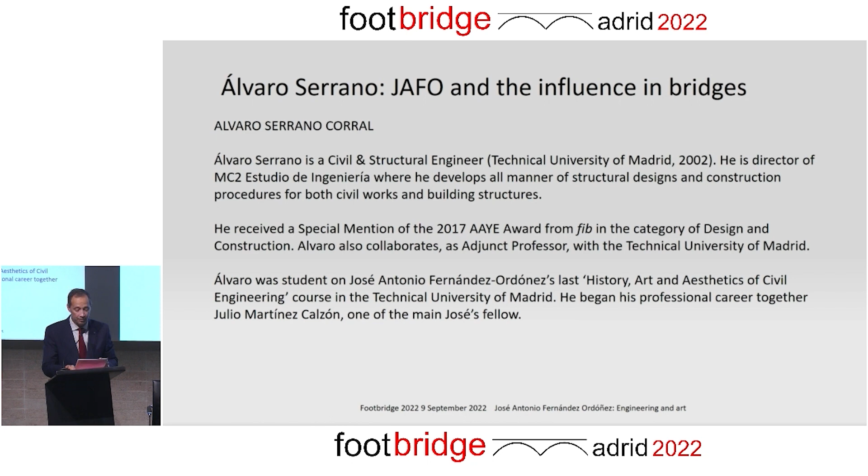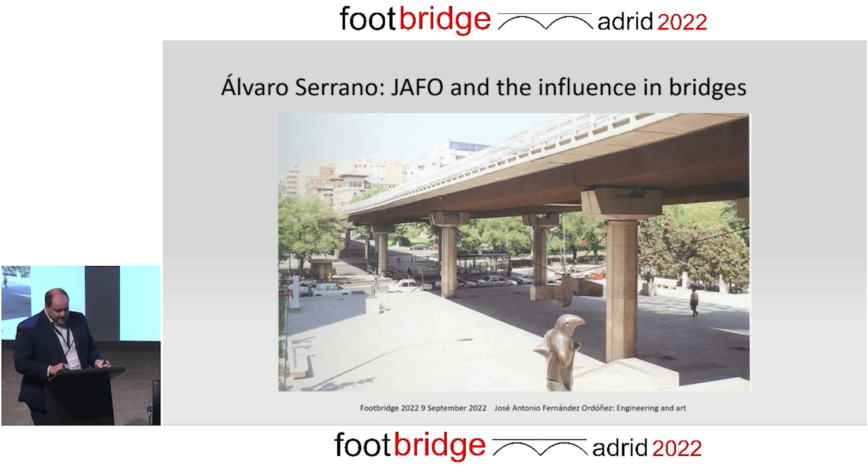Thank you very much, David. It's for me a pleasure and also an honor to do this review of José Antonio Fernández Ordóñez's works on bridges and also footbridges. Then let's begin.

When José Antonio Fernández Ordóñez finished his civil engineering studies in Madrid in the late 1950s, at that time, with few honorable exceptions, the panorama of bridge engineering in Spain, as he stated himself, was dominated by a system of obvious things protected by common sense in an environment of resistance to creation.

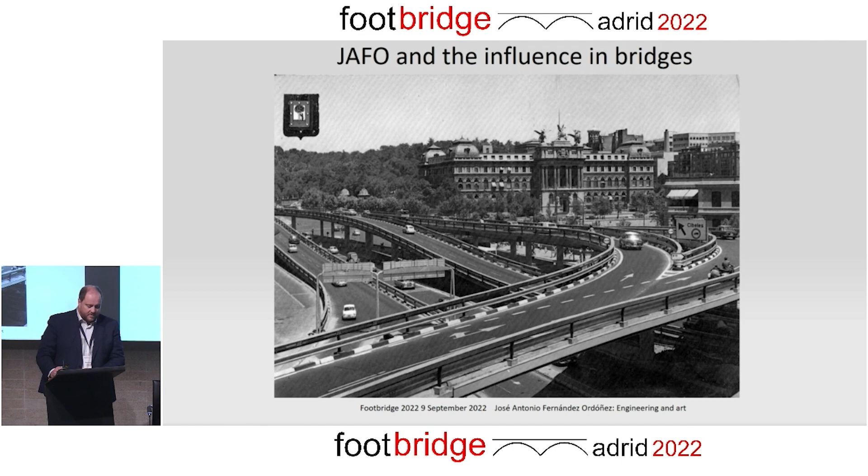And the bridge, as a symbol of engineering and connection between people and therefore progress, had become an absolutely utilitarian, routine element, and in many cases indifferent to people who tended to reject it as a reaction.

At the end of the 1960s, the City of Madrid called a design and build competition for the construction of a bridge over the Plaza de Cuatro Caminos, to which the young José Antonio, along with his colleagues Julio Martínez Calzón and Alberto Corral, participated.

They did not win the contest, probably because of the novelty of the proposal and also because of the excellent bridge that Carlos Fernández Casado proposed. But the proposal already revealed a new way of understanding bridge design, and the team was effusively congratulated.

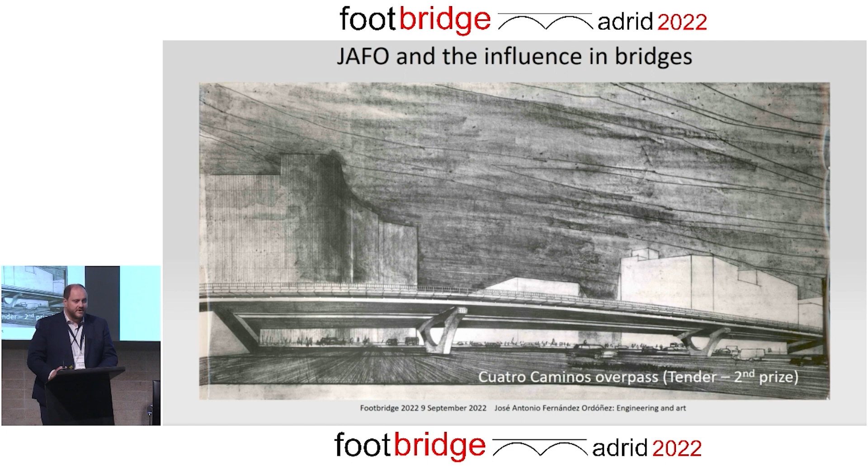On his second opportunity, a new bridge to connect Juan Bravo and Eduardo Dato streets over Paseo de la Castellana, the main street in Madrid, the team led by José Antonio, who had joined the sculptor Eusebio Sempere, won the tender.

The Juan Bravo Bridge was a magnificent challenge, crossing the center of Madrid in an area whose urban landscape is extremely sensitive, at a relatively low level and making the crossing of vehicles compatible with urban pedestrian use both above and below the bridge.

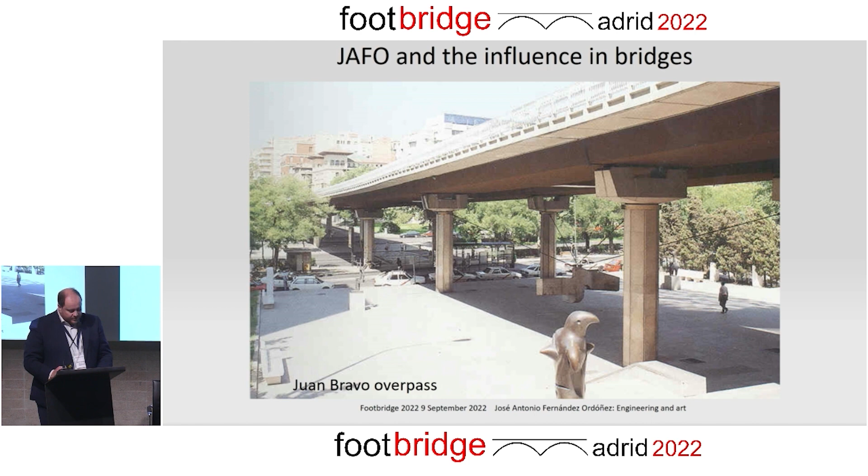And the proposed solution was extraordinary, as it had not been seen before, integrating the bridge into the city and its surroundings.

An exemplary way, introducing a new way of looking at and designing bridges in Spain, especially those located in urban areas. I cannot say it outright, but it was probably the first bridge in Spain whose design, after many years, contained an explicitly justified and rigorous aesthetic study.

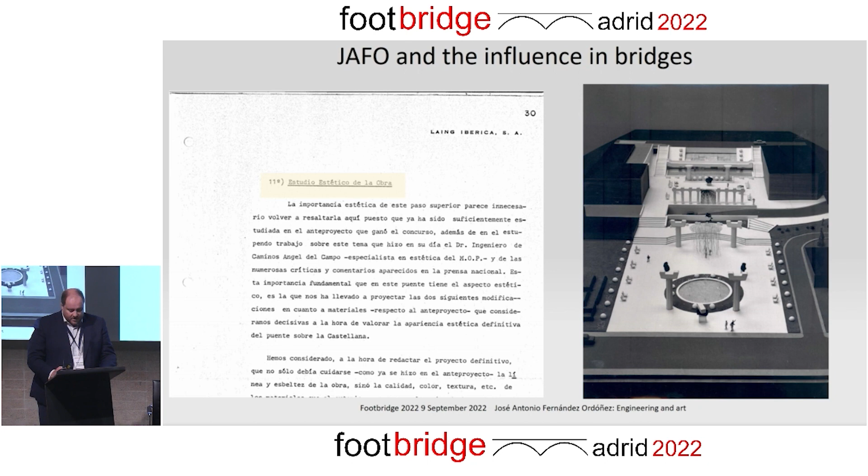An analysis of the work basing itself on drawings, geometric criteria, models, and generation of a multitude of details for each one of the parts of the work. Nothing was conventional or arbitrary. Everything was designed individually.

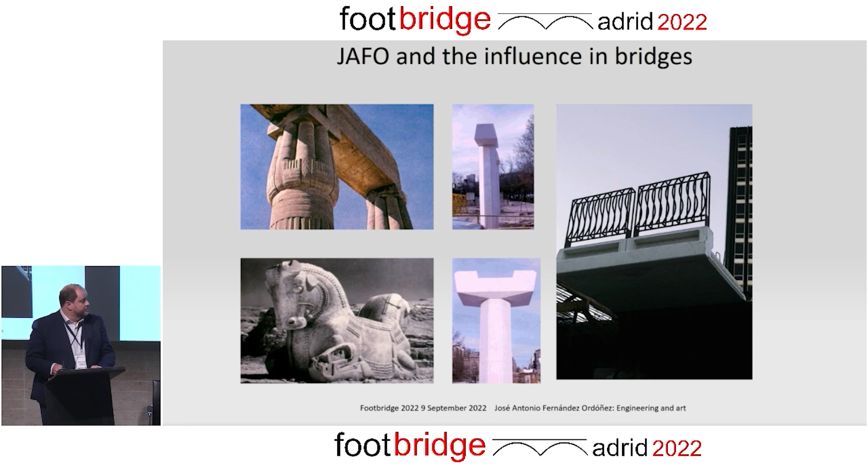It can be said that this bridge changes the concept of ornamentation existing at that time, which, due to pure functionalist hostility, had given rise to a lack of interest and carelessness in details.

José Antonio Fernández Ordóñez does not renounce ornamentation, but renews it from a point of view that elevates and manifests the structural point of view, renouncing everything that is useless, but with the utmost care for details, within the rigor of classical culture.

Technically, the project also represents a notable advance in Spanish bridge engineering, representing the first modern composite bridge to be built in Spain, and including some novelties, such as the use of white concrete in a bridge.

Or the use of prestressed precast slab before connection to the steel girder, built with weathering steel, which was also the first time it was used in Spain.

Beyond just proposing a transit infrastructure, the project designed an entire urban environment of the highest quality, with the permanent exhibition of sculptures by the best contemporary Spanish artists, with some pieces made specifically for this place.

Such as the sculpture by Eduardo Chillida, commonly called the Sirena Varada, the stranded mermaid.

In my opinion, the Juan Bravo Bridge inaugurates in Spain a new way of designing urban or semi-urban bridges in which the viewer's gaze is completely nearby, as the bridges really become objects of the city landscape, similar to any other building or element in the city.

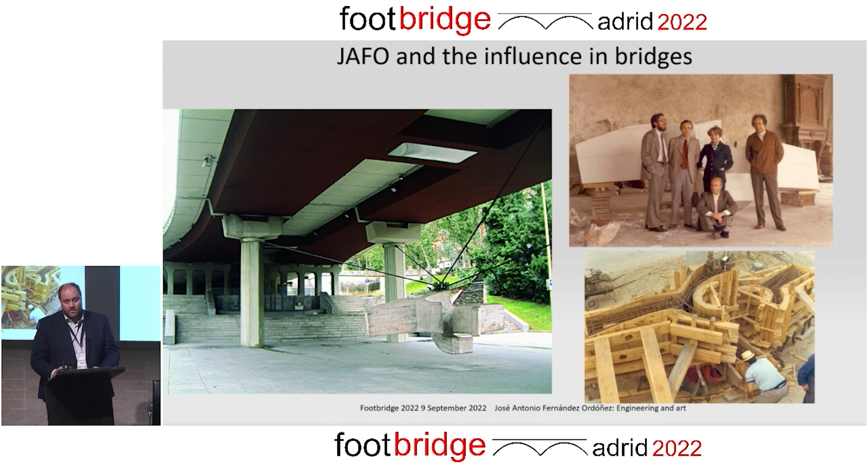With the same perspective, José Antonio designed his second built bridge, the Devil's Bridge in Martorell. In this case, the complexity is manifested by the place where it must be located, with great topographical and geological difficulties, but also with a great historical richness, being a few meters from another Devil's Bridge of Roman origin and medieval construction, with a triumphal arch at its entrance.

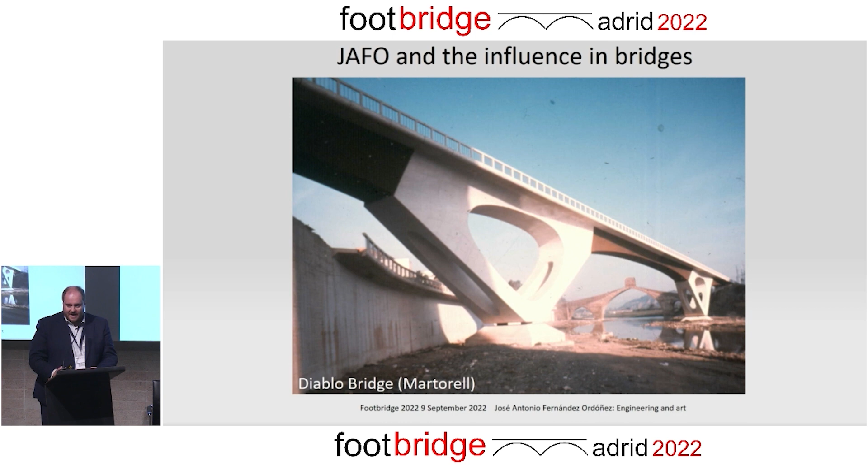The built bridge is a composite structure of prestressed concrete and weathering steel, with two large white concrete piers, which are like two monumental tetrapylons that formally link with the Roman tradition. The four parts of the tetrapylon are joined at the bottom to form a single support, leaving the piers configured with a special character, not prismatic or circular as usual.

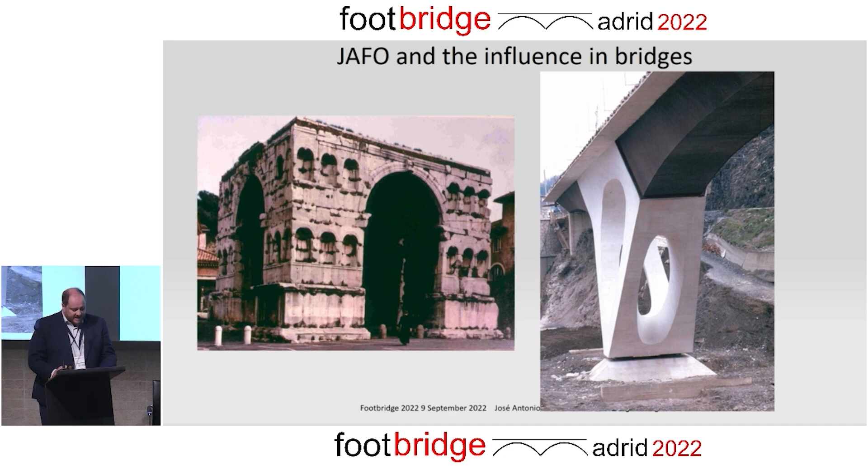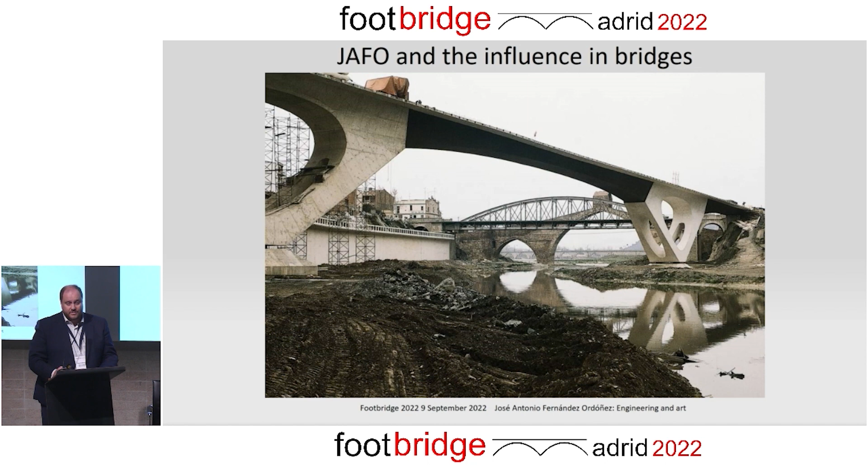The bridge also inaugurates a set of bridges that we could call sculpture bridges, with a deep formal analysis of the large concrete piers, very close to the character of a sculpture, although at the same time fully and harmonically combined with the structural, resistant and constructive aspects. This interest in treating the piers as sculptural elements and their connection with the deck was manifested in many other bridges built later and in multiple models and studies carried out for different projects.

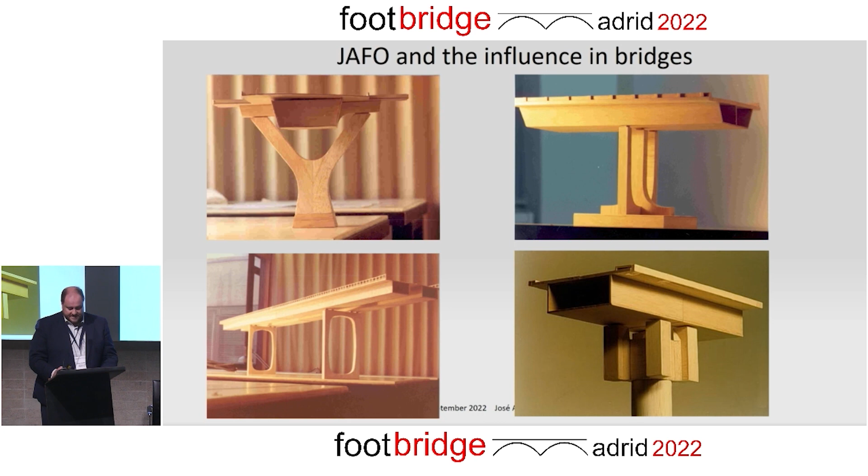10 years later, the Millennium Bridge in Tortosa was designed. This bridge over the Ebro River near its mouth has three spans, the main one with a span of 180 meters, conditioned by the hydraulics of the riverbed, and its piers are essential elements of the design composition. They are conceived with a clear sense of space, far from the usual conventional approach of prismatic or cylindrical piles, and built with white concrete.

Each one consists of a shaft with two cantilever arms on each side, which are part of the composite deck that is fixed to them. These two large sculptural piles also resemble the T of the city of Tortosa.

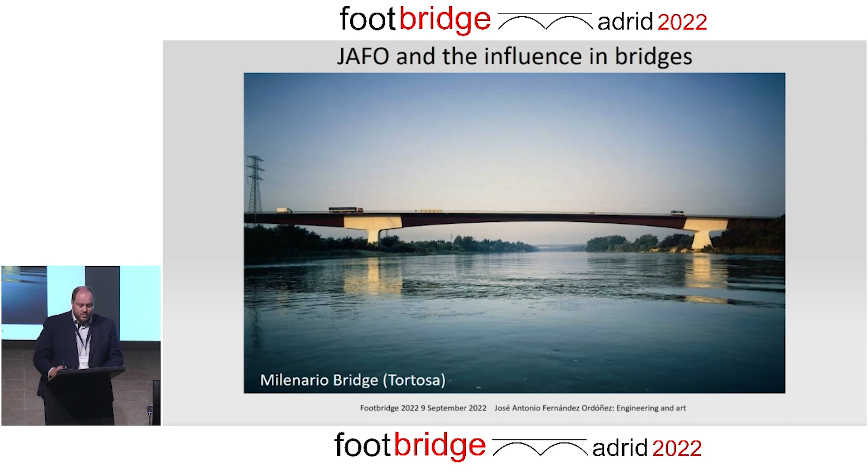José Antonio Fernández Ordóñez believed that this bridge should transcend the mere fact of a public work, and designed its abutments as two twin buildings to house a museum about the Ebro River, although only one abutment was finally used. Besides, this bridge had the longest span in the world for 4 years for a composite bridge, with 180 meters.

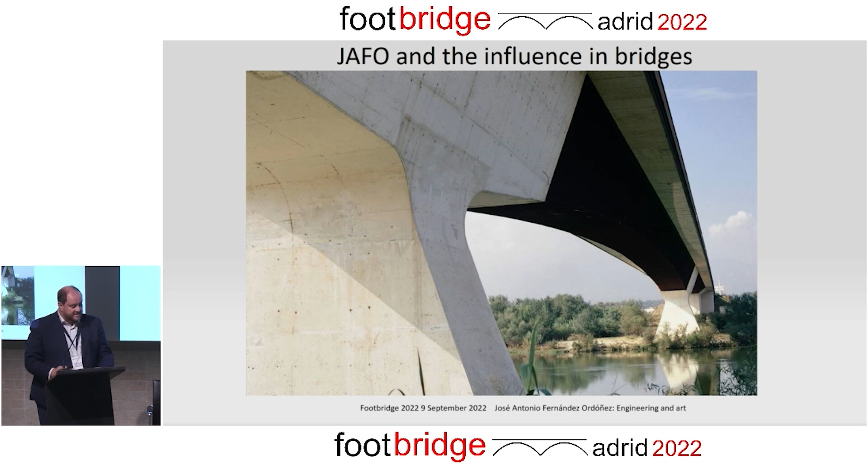The next milestone in José Antonio's works is the Bridge of Centenary in Sevilla. This large-scale bridge was designed and built at the end of the 1980s in collaboration with Julio Martínez Calzón, Francisco Millanes, and Guillermo Ontañón, and consists of a cable-stayed bridge with a main span of 265 meters and almost 50 meters above the river, with two large access viaducts totaling about 2 kilometers.

Without neglecting the inevitable emblematic character that a structure of its dimensions was designed to acquire, the intervention in the outskirts of the city demanded a high aesthetic dignity, which also had to be maintained at a strict cost level and with a fast and efficient construction system.

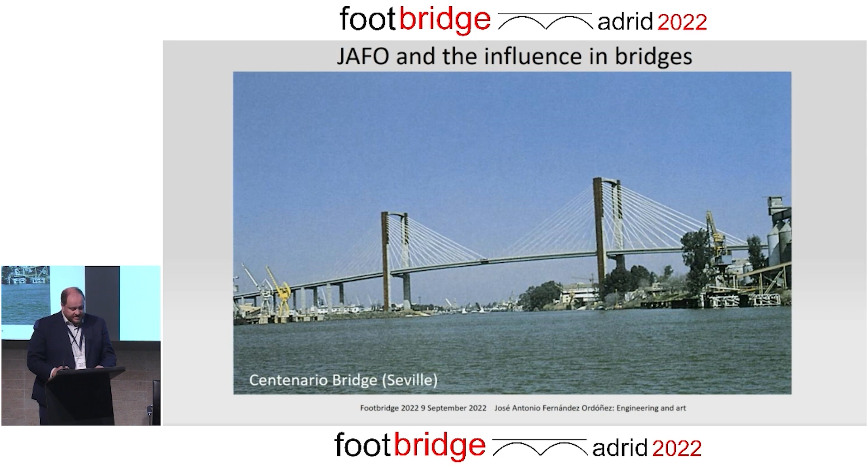The solution came from the combined use of steel and concrete in a large pylon and the systematic precasting of the deck. Thus, the composite structure of the pylon achieves a mutual and total understanding, not differentiating between the two materials, steel and concrete, which also facilitates their construction process.

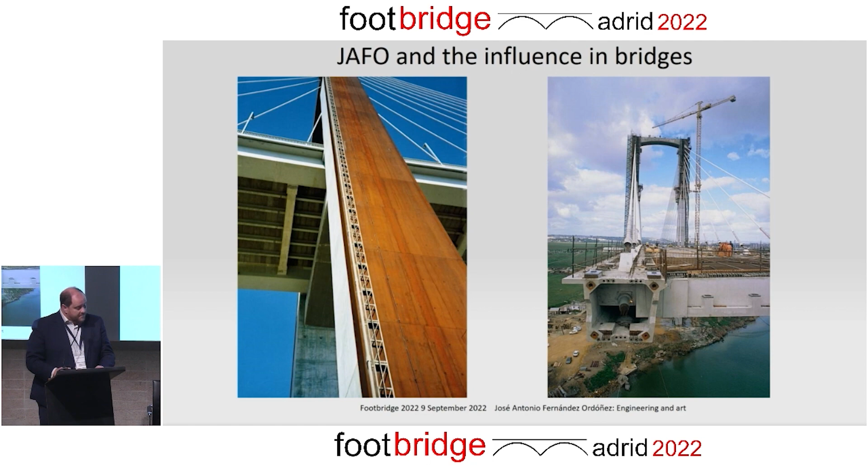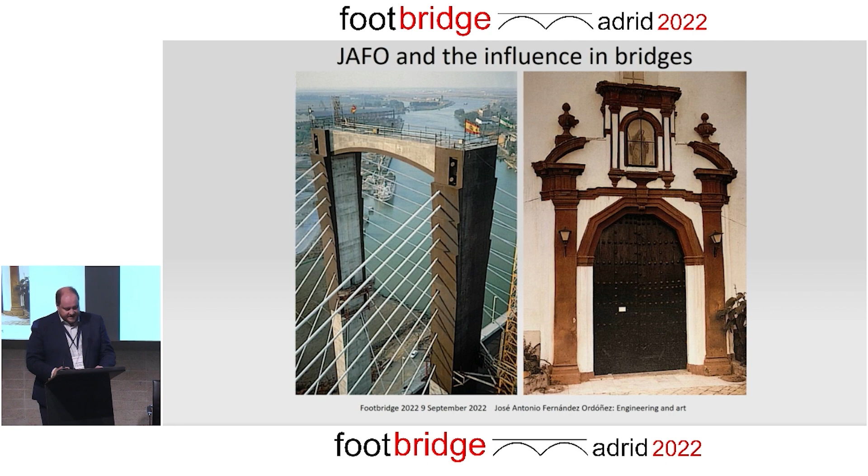Memory and place are also two of the essential dimensions that come together in José Antonio Fernández Ordóñez's bridge projects, both being closely linked. His bridges dialogue with the place where they are located, not only with the sensible landscape but also with the cultural landscape. In this case, the pylons, due to their shape and color, evoke the houses, churches, and patios and courtyards in the city of Seville, in a subliminal way that contributes to intensifying the deeply personal character of the work.

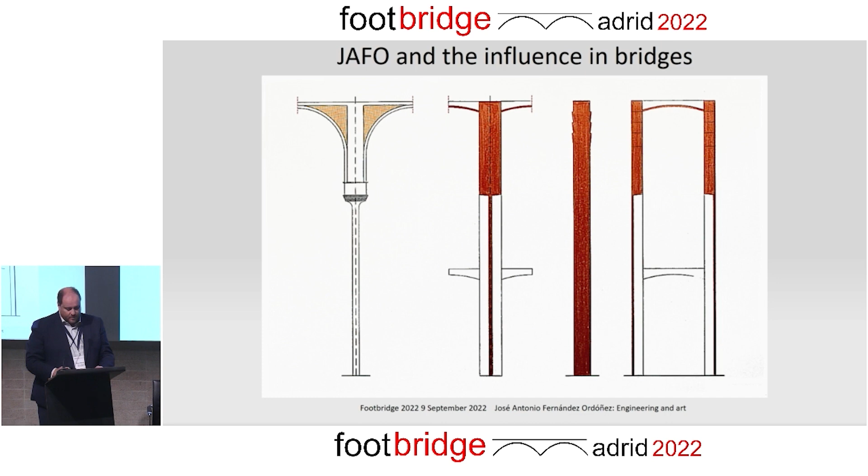The deck, on the other hand, is made up of 4 prefabricated typical elements that allow a fast and systematic construction with a very controlled quality.

The viaducts of Camas and Guadalquivir, two railway bridges, extend over a very flat and luminous landscape, which successively crosses farmlands, channels, roads, and particularly the Guadalquivir River, always at a very low height. It is a railway viaduct, so with high loads, which, in the absence of large obstacles to overcome, requires a moderate span and high deck, which usually leads to a crude, heavy, and unfortunate design.

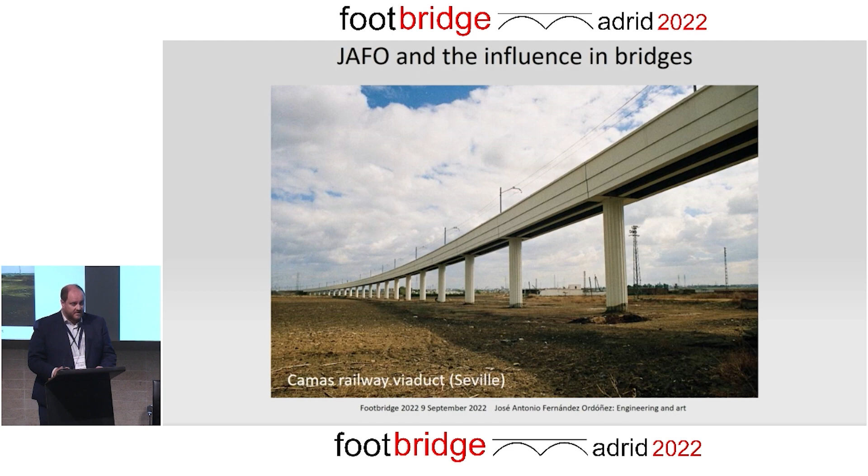In this bridge, José Antonio Fernández Ordóñez radically breaks the preconceived engineering idea that associates slenderness with aesthetic quality, proposing a visual deck height of 4.5 meters for only 33 meters of span, just over 1/7.

In this case, he conceptually deals with the problem of slenderness in a different way than usual. Instead of contemplating the relationship between the small span of each span with respect to the depth of the bridge, he considered that this should be valued as a unitary piece with respect to the wide Guadalquivir Valley, perceived as a whole, as a long ribbon extending over the landscape that is perceived between both abutments.

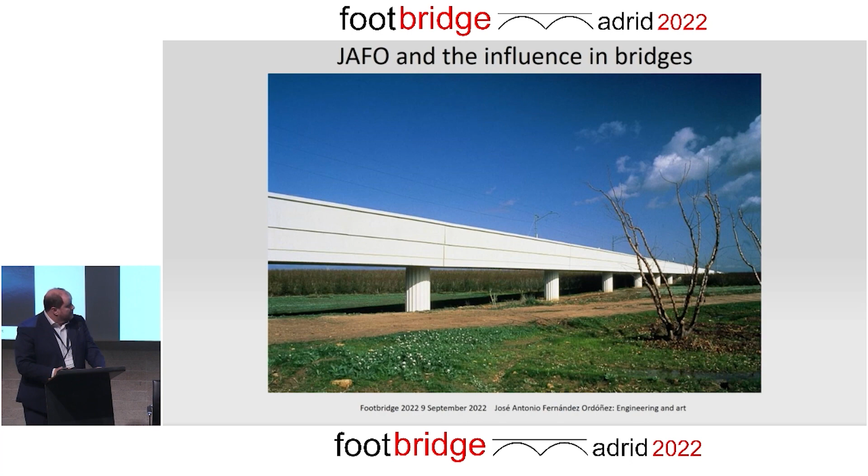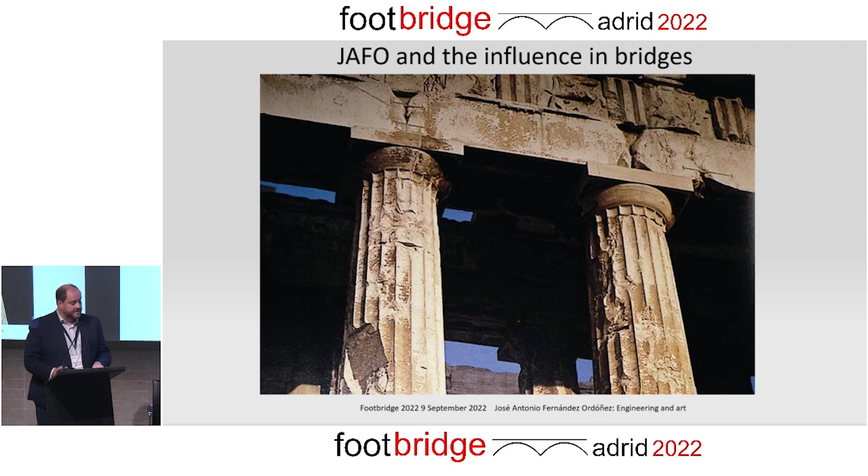The historical component, in this case, is achieved by seeking a presence very close to Greek art, using a reference image of a continuous bridge supported by a colonnade. The economy and constructability of this solution was achieved through the systematic use of prefabrication and the use of statically determined spans.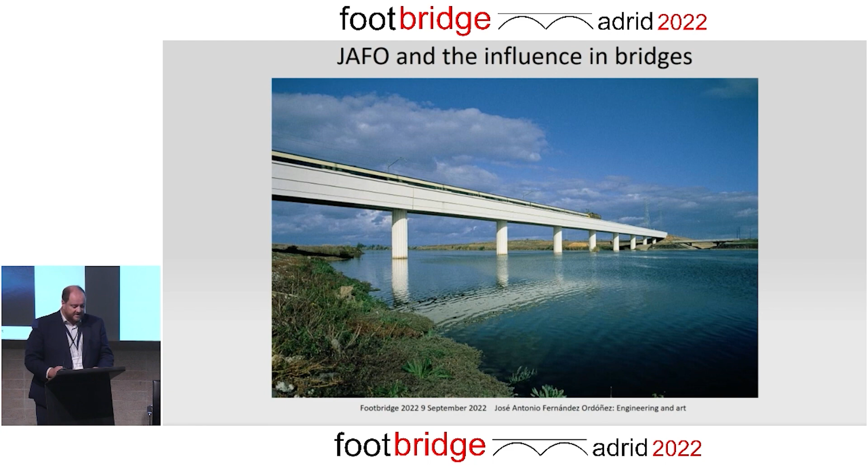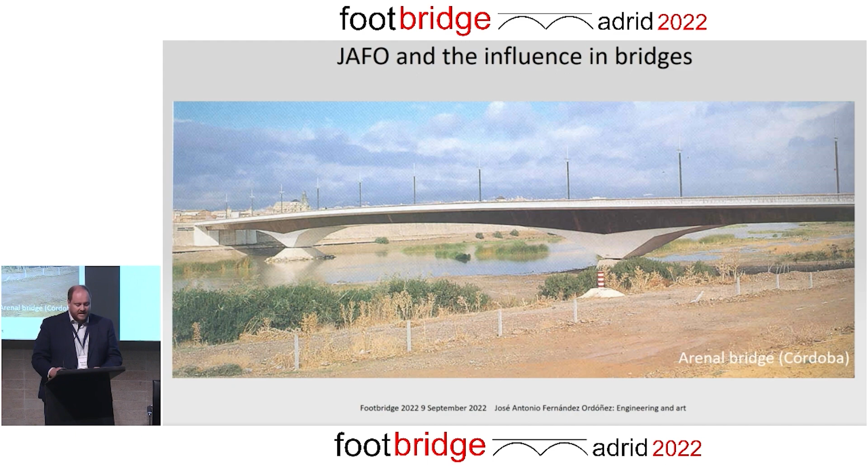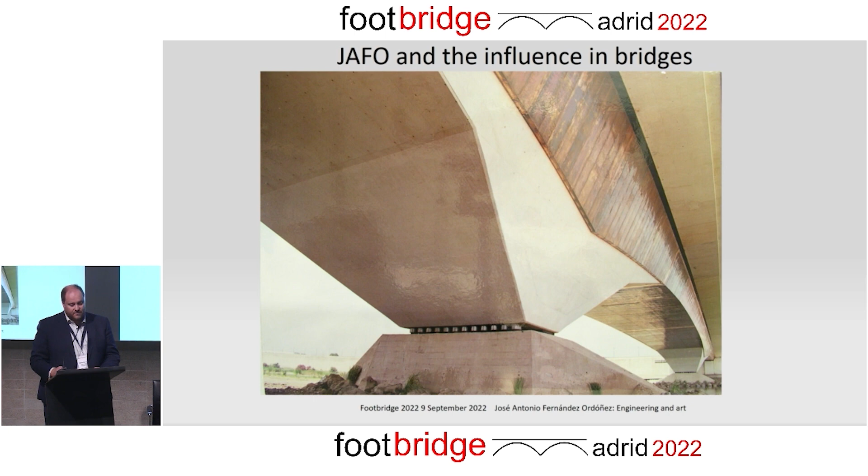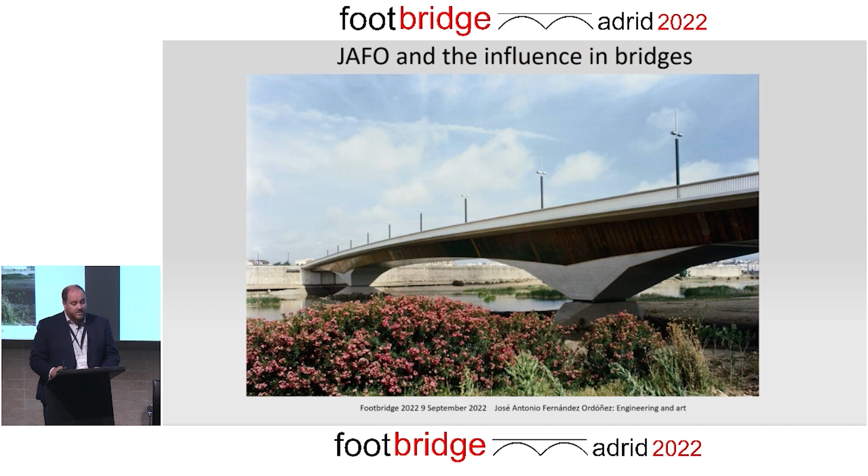The Arenal Bridge over the Guadalquivir River in Córdoba represents another important milestone in the introduction of typological and aesthetic structural innovation in composite bridges, as well as joining the line of sculptural bridges with large concrete piers and composite decks. On the aesthetic level, its essential novelty lies in the use of white concrete in the decks and pylons, and in the cladding of the bridge structural steel with thin sheets of copper, in order to get as close as possible to the image of the historic buildings of the city of Córdoba, with its whitewashed facades and copper-colored roofs.

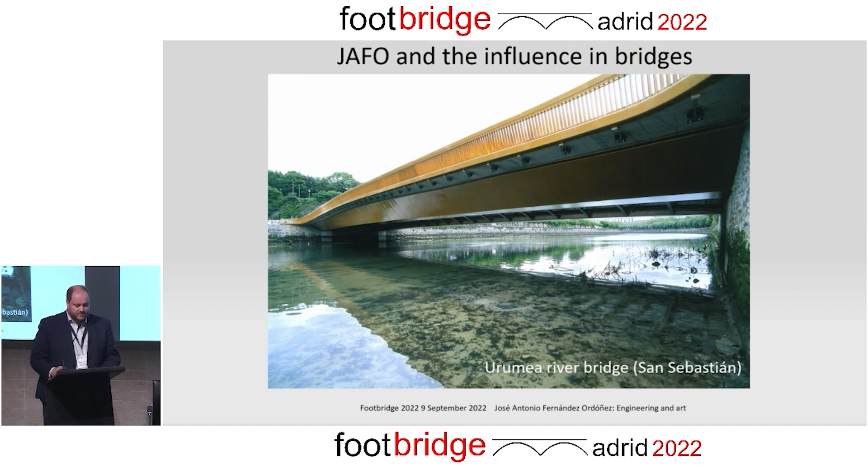The fourth bridge over the Urumea River in the city of San Sebastián was the winner of a competition held in 1992. The bridge, despite being located in a monumental city with monumental bridges, is not presented as an ostentatious or gimmick work. On the contrary, it presents itself in a simple, serene, and elegant way, simply built to fulfill its mission of crossing a modest estuary in a beautiful city.

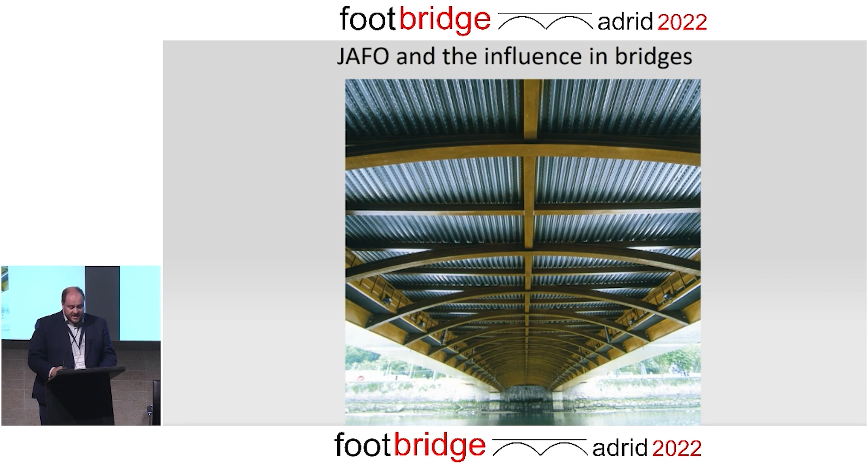All the simplicity of its design, almost devoid of any aesthetic intention, changes when the power of its technique is revealed, with a very slender deck, approximately 1/30, fixed in its abutment by means of elastic fixing cells. In this bridge, everything relies on precision and rigor in the choice of materials and attention to detail to constitute a work of total harmony and dignity.

The Infante Dom Henrique Bridge over the Douro River in Porto is the last great bridge designed by José Antonio, together with Francisco Millanes and his team in Ideam, and Antonio Adao da Fonseca and his son Lorenzo, and he unfortunately did not get to see it finished due to his premature death in the first days of the year 2000.

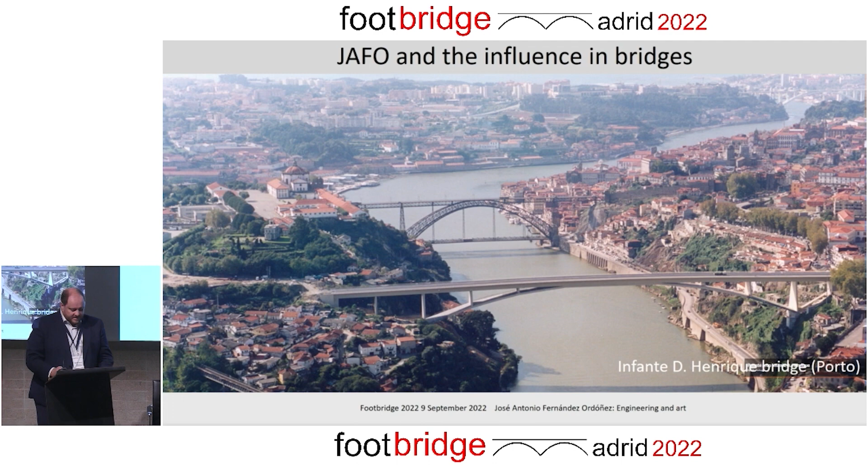This place is magical for any bridge engineer. The magnificent city of Porto at the mouth of the Douro, surrounded by bridges that are historical milestones in bridge engineering history. The bridge has no desire to enter into competition, neither with the wonderful skyline of the city, nor with the rest of the bridges that surround and accompany it.

The solution is simple and neutral for the city, without renouncing a vanguard technology, but this technique remains discreetly in its place, without appearing ostentatious. Porto did not need any more ornamental symbols.

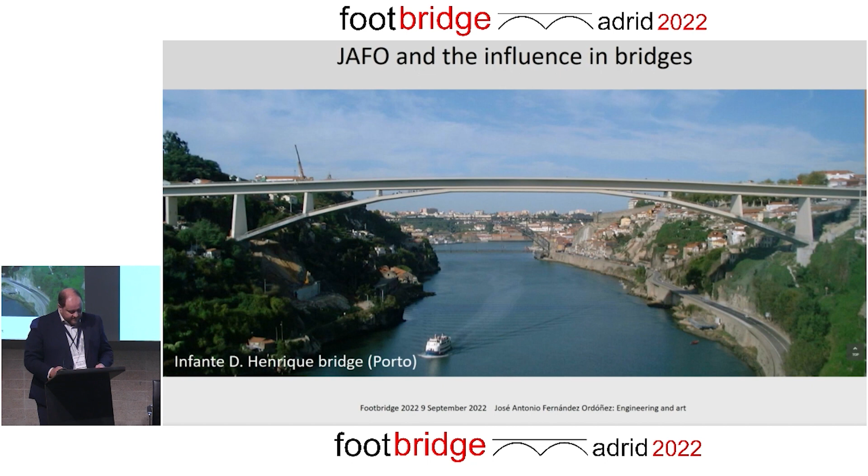The bridge flies like a bird from Porto to Vila Nova de Gaia, without leaning on the Douro riverbed, not even on its banks, with great cleanliness and sensitivity, expressing its functionality in the purest possible way.

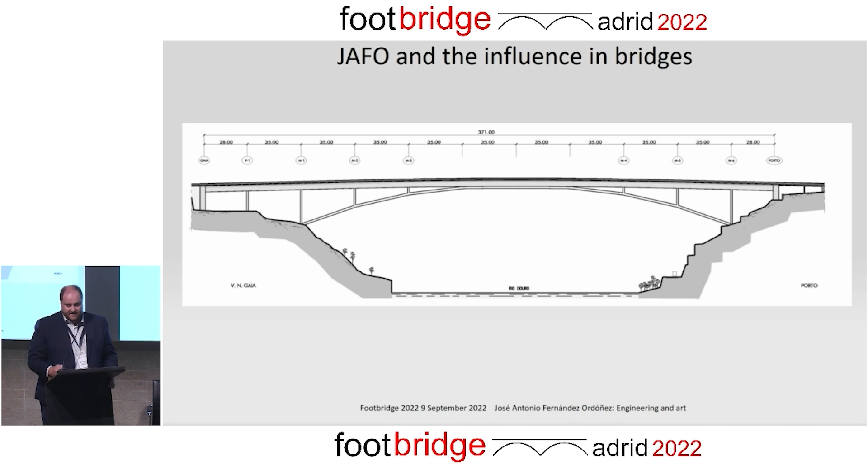A singular and very slender arc, 1.5 meters deep for a span of 280 meters, which naturally and harmoniously rests on the high rocky areas of the river slope, built by cantilevering from both banks.

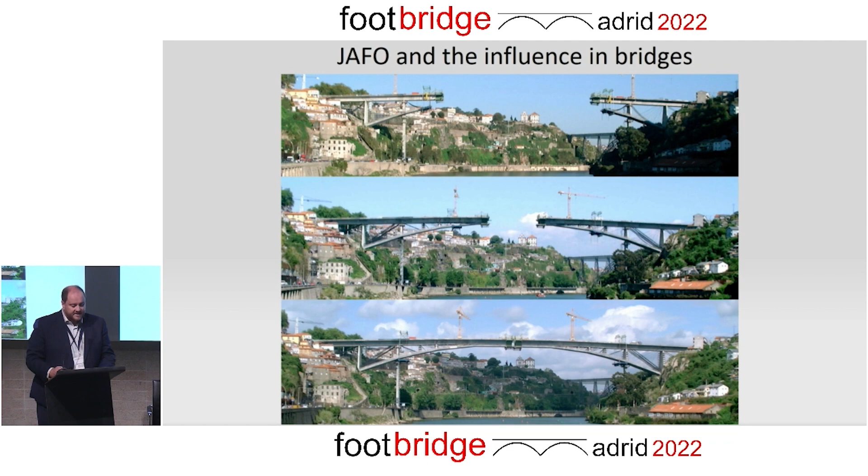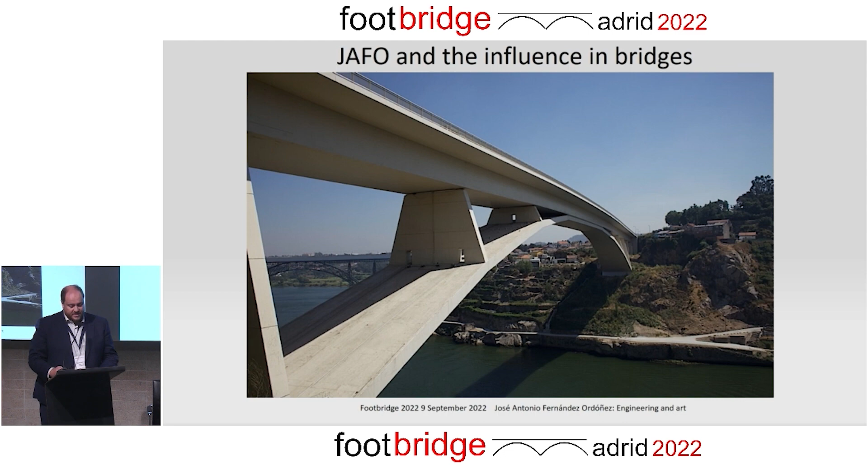The bridge was initially designed with a stainless steel arc to minimize maintenance cost, a circumstance that would have been a worldwide milestone at that time. Finally, it was entirely built in concrete without losing its singular uniqueness.

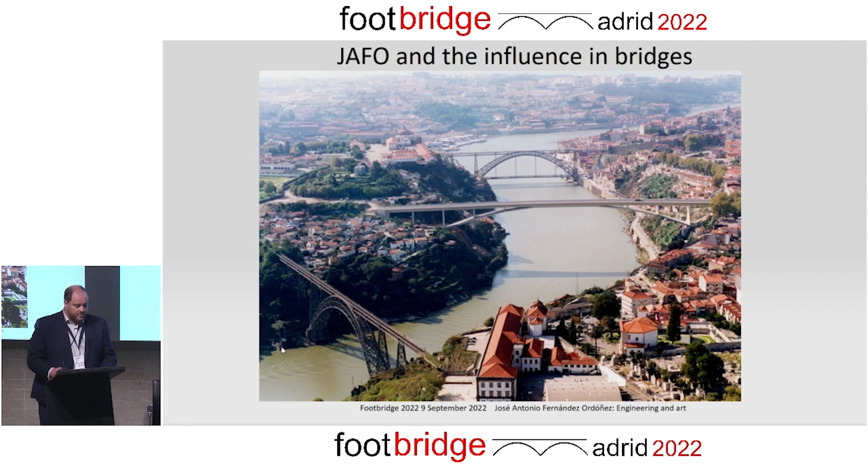José Antonio Fernández Ordóñez always had the utmost consideration for pedestrians on his bridges, designing wide, beautiful and pleasant pedestrian accesses to pass and to stay. But the Padre Arrupe Footbridge, or Abandoibarra Footbridge, was his only work exclusively designed for pedestrians.

In a Footbridge conference, it seems a good culmination to review the work of José Antonio through this work. The Padre Arrupe Footbridge is located in Bilbao, in an environment with a strong personality, surrounded by the Guggenheim Museum, the Salve Bridge, the University of Deusto, and the Deusto Bridge.

An environment characterized by tradition, Deusto, and innovation, the Guggenheim, in which the footbridge has to be harmoniously integrated. Its form arises from a rigorous analysis of the functional needs of the paths that take place on its two banks, with two different levels connecting all entry or exit points with each other by means of ramps and stairs.

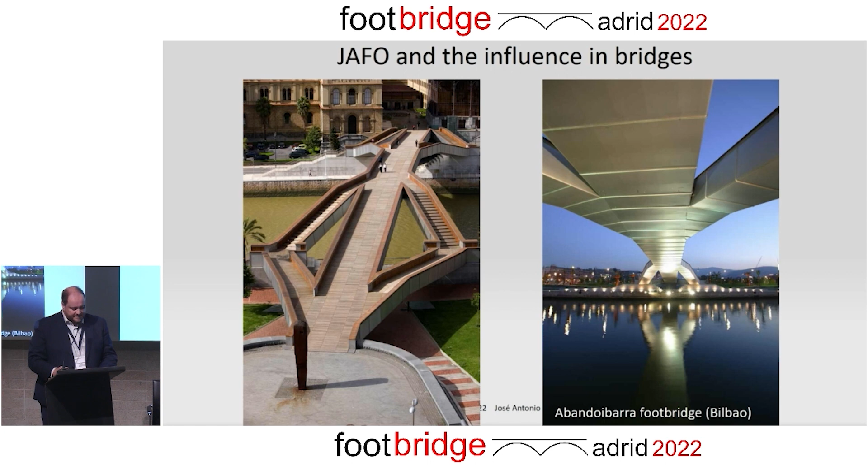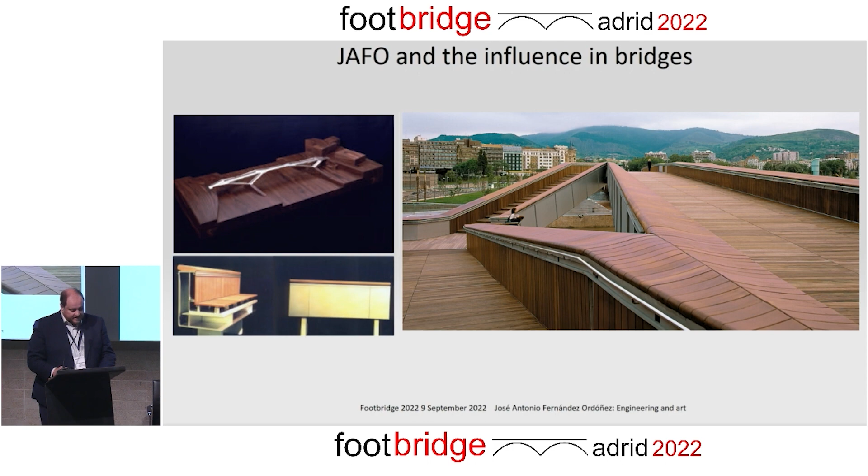The cross-section is made up of two steel lateral ribs. The ribs are clad with wood, generating a channel through which people circulate. In this case, the footbridge was made of stainless steel.

To conclude, the footbridge was inaugurated on March 28, 2003. Two days later, on March 30, the Infante Dom Henrique Bridge was also opened to traffic. In these three days, the work of José Antonio Fernández Ordóñez was completed.

José Antonio's writing work is extremely extensive, as David has shown with the book. However, at no time does he personally value his own work. In his entrance speech to the Academy of Fine Arts, he leaves this appraisal to future generations and expresses his only fear: posterity is the only true judge. What I fear most is the indifference of colleagues who succeed me in future times. That is the only refutation I will accept.

In those days of 2003, the personal work of José Antonio Fernández Ordóñez ended. Today, 20 years later, we can categorically affirm that his personality and his new way of seeing and designing bridges is still valid, and his influence on future generations, far from the indifference he feared, is very clear. Thank you very much.